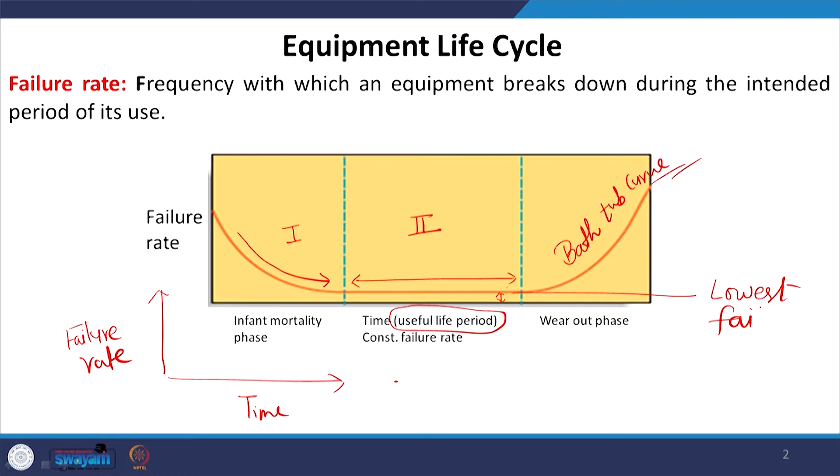So, you can say that this is the lowest failure rate. So, it is a very important thing for us to remember that the lowest failure rate of any equipment is in the second phase, and then comes the third phase, where slowly the failure rate again starts increasing, and it is the phase of wear out, when the replacement of that particular product is required, because the product has completed almost its complete life, and then it requires replacement.

So, here you can say that the first phase is known as the infant mortality phase, where after some time the failure rate decreases. It is very similar to our human life. When a baby is born, initially the failure rate, meaning the chances of getting sick, is very high. You need to save that child from extreme cold and extreme weather, and even with that care regular failures are possible. Regular failures means you may need to visit the doctor again and again.

So, that is the period of infant phase. After some time, when that child grows up, may come into the ages of 15 years, 16 years or 18 years plus, then probably up to 60 years, that is the productive life of the human being, and that is the period where that person is able to take care of all types of weathers without any kind of failure, without getting sick normally. So, that is the second phase.

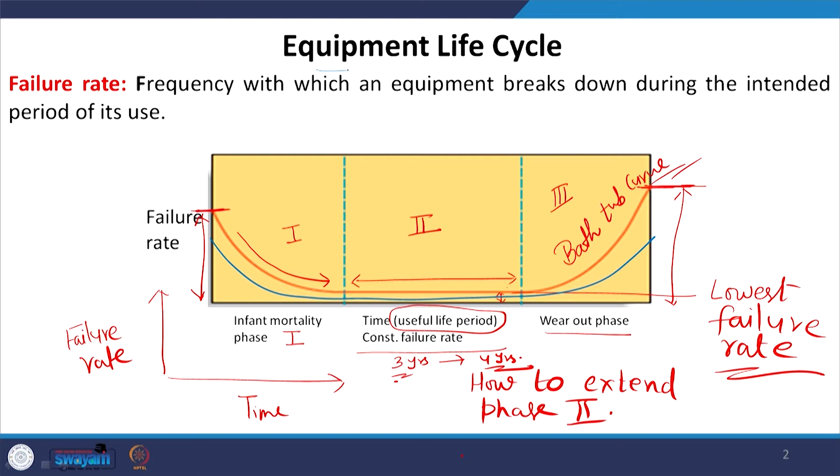So, that is again possible with proper maintenance planning, so that you take minimum failures, because whenever failure is taking place it is going to incur cost, it is going to disrupt your production schedule. So, therefore, it is important that we make a better plan so that we can actually play with this bathtub curve. So, this is one important thing about the measurement of our maintenance plan.

Now, in our last session we discussed the concept of MTBF, the concept of MTTR and the concept of availability. Now, based on these three concepts we have a numerical problem, and let us see how we solve that. So, some data is given to us.

The data reads like this: a manufacturer of wet grinders tested its product to assess the various maintenance performance measures. 50 wet grinders were each put to test for a running time of 1000 hours. So, total running time is 1000 hours. This is important data. It was found that there were totally 60 failures during the testing phase. Totally 1350 hours were lost on account of identifying the problems and restoring it back to working condition. So, this is the total data available with us.

Now, based on that we will calculate the failure rate of wet grinders, mean time between failure, mean time to repair and availability of the wet grinders. So, now this calculation says the total time the testing was done, because 50 grinders were tested for 1000 hours each.

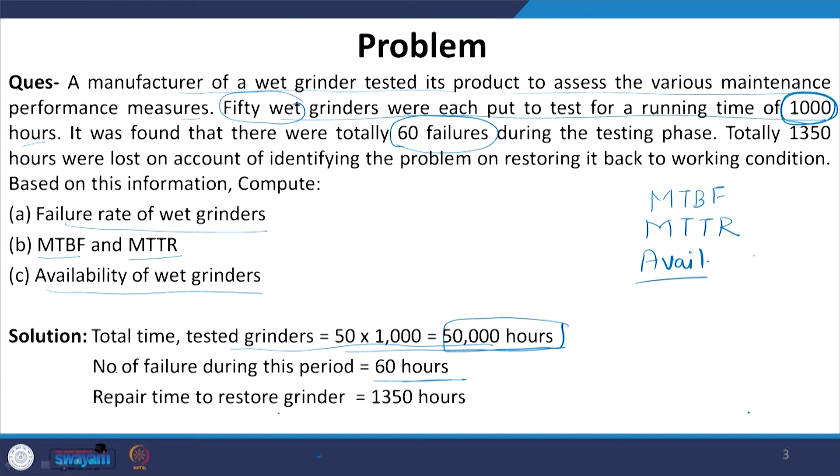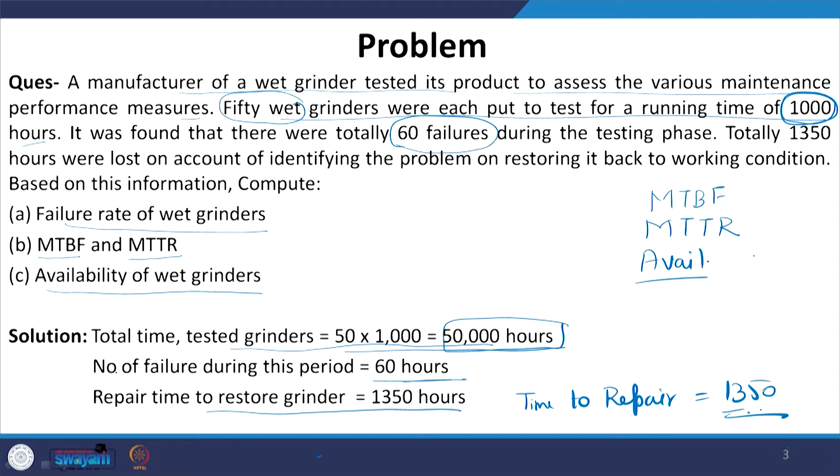So, total testing time is 50,000 hours, that is the total time of testing. Now, during this the number of failures is 60, and repair time to restore grinders, that is time to repair, is 1350 hours. Now, based on this we will do the calculations. The failure rate of grinder is number of failures divided by total time. Total 60 failures were identified, 60 divided by total time for which the test was done, 50,000 hours.

So, the failure rate is 0.0012 failures per hour. This is 0.0012 failures per hour, or you can say that in how many hours one failure will take place. So, it can be read otherwise also. So, it is the failure rate.

Now, mean time between failure. Mean time between failure is total time divided by number of failures. Now, the concept we have already discussed, like this is the total time, that is 50,000 hours, and total 60 failures are taking place. One failure here, second here and so on, this is the 60th failure. So, these are the 60 failures which took place over this 50,000 hours.

So, the mean time between failure is the total time divided by number of failures. So, 833. So, on an average after 833 hours failures are taking place.

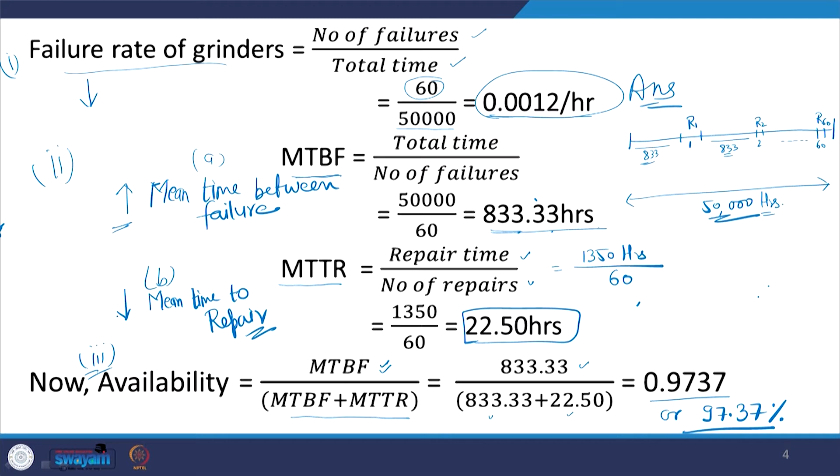Now, as a maintenance engineer, as a maintenance manager, we want to reduce the failure rate. We want to improve the mean time between failure, it should be as high as possible. We want to decrease the mean time to repair. It means that your product has good maintainability. Whenever it fails, it can be quickly fixed, it can be quickly restored. So, that is mean time to repair.

And finally, we want high availability, that all through the life, how much percentage of the time the product is available to you. So, that is the calculation of your maintenance management plan. We want low failure rate, we want high MTBF, we want low MTTR and we want high availability. So, that is how you can summarize this whole discussion.

Now, the alternative maintenance plans which I gave you in the beginning of this session, and we have already discussed them in our previous session in detail. So, based on the impact of maintenance alternatives and the cost of maintenance, let us see how these different types of maintenance plans are going to help us.

So, the impact of maintenance alternative is very low when we are having the routine inspection, and you can see that this is the direction of movement. The cost of maintenance in case of routine inspection is very low, because you just need to see that all your wires are properly connected, the coolant level is proper, the oil level is proper, the pressure in your tires is proper. So, just by visual inspection you can see all these things.

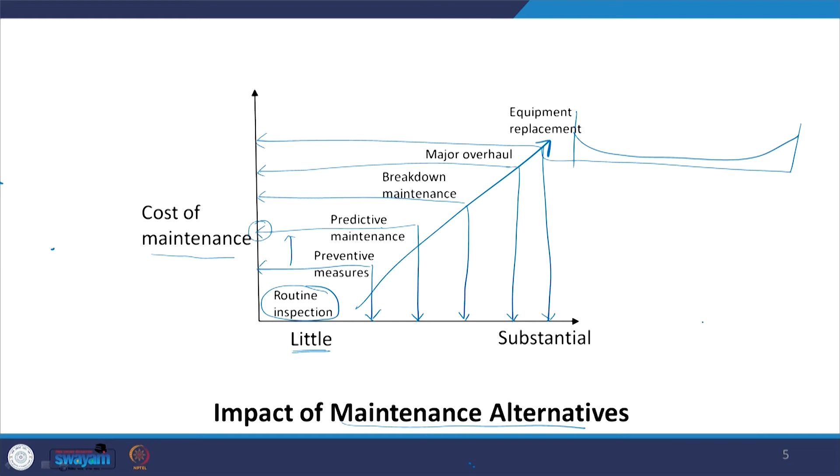So, that is another very important discussion with respect to your maintenance planning, how these different types of alternatives are helping you to achieve the objectives of your maintenance plan.

Now, finally, as we discussed in the previous session also, the present-day concept of maintenance which we are following is TPM, that is total productive maintenance, and it is that approach of equipment maintenance that seeks to achieve zero breakdowns and zero defects. Now you see, zero breakdown is the issue of maintenance, and zero defect is the issue of quality.

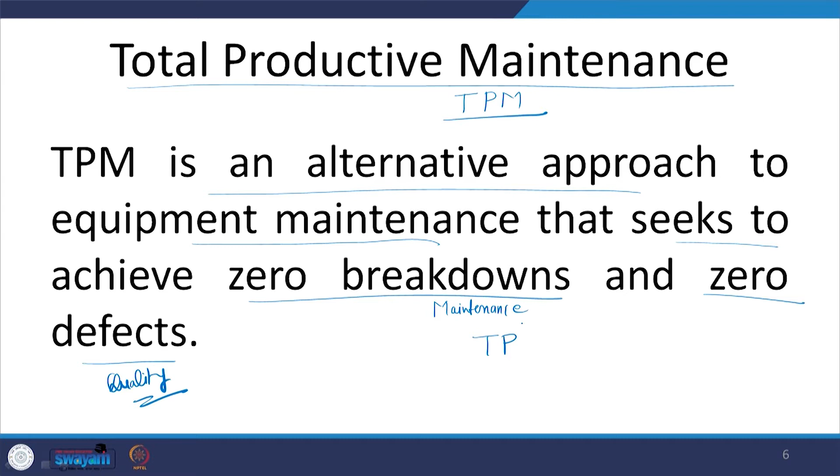So in fact, when I am talking of TPM, to some extent you can say that TQM is a subset of TPM. In our quality management discussions, we discuss this very aspect that all departments, all functional areas from the top to bottom, need to fulfill the objectives of the organization, particularly in the direction of customer satisfaction.

But now we see the objective of TPM says zero defect and zero breakdown. So the combination of these two things, zero defect and zero breakdown, gives you the concept of TPM. So with this direction, TPM becomes a much wider concept. Now to incorporate these two things, we have a very interesting concept known as overall equipment efficiency, OEE. That is a very unique and interesting concept which combines these three things.

What are these three things? One is the availability, which we have already discussed, the combination of MTBF and MTTR. Then the second is performance efficiency and the third is quality rate. So these are the three important things which we combine to calculate the overall equipment efficiency of any equipment. Now the performance efficiency is theoretical cycle time into actual output divided by operating time. That gives you the performance efficiency.

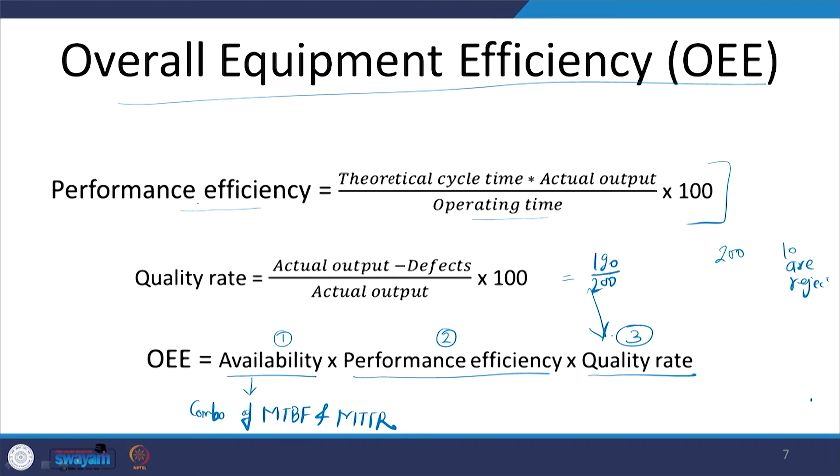And the quality rate is the actual output minus the defects divided by the actual output. So for example, you are producing 200 output and out of 200, 10 are rejected. So 190 divided by 200, that becomes your quality rate. Performance efficiency is coming because of various types of losses in your activities, because your machine is not always running at 100% performance. So there are chances that your machine will not have 100% performance rating, and as a result we will see that some losses are there.

Now we have a very good system where availability is 0.9, the quality rate is 0.9 and performance rating is also 0.9. All these three things are very good on their own. Availability is 90%, quality output is 90% and performance rating is 90%. Now you see the OEE, that is 0.9 into 0.9 into 0.9, and now you can understand how the OEE of a system that is very good individually is coming to be around 70%.

So that is the problem with this calculation: individually your things are very good, but the holistic measurement is also required. Therefore here we want to have Six Sigma, here we want to have TPM, here we want to have better PPC. All these things put together will help us to improve our OEE, because there are different types of losses in our production system which affect our OEE calculation.

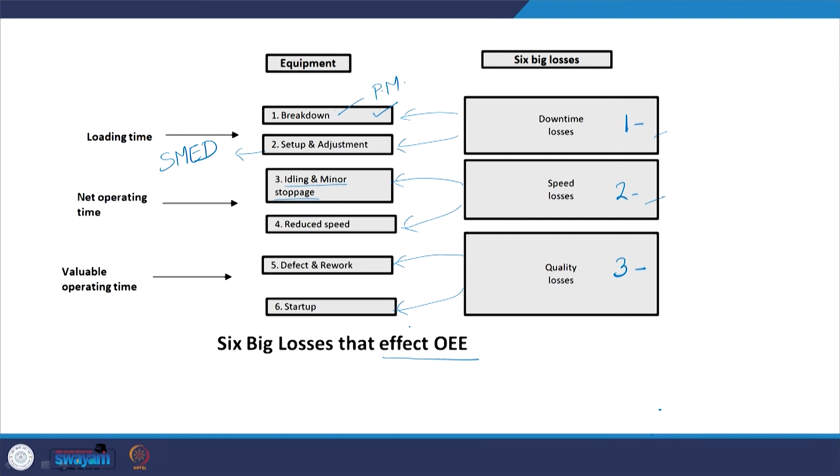So, these are the three types of losses. So, you have to see how we can minimize all these losses, so that our downtime is reduced, speed losses are reduced, and quality losses are also reduced, which finally translate into the OEE calculation. So, we need to work on availability, performance rating, and quality output, so that OEE becomes higher for our equipments.

You can calculate OEE for an individual machine, and you can also calculate OEE for your entire plant. So, normally for excellence in maintenance activities, we work on OEE for the entire plant, and to recognize the efforts of organizations for excellence in the field of maintenance management, the Japan Institute of Plant Maintenance came with a TPM prize, TPM award.